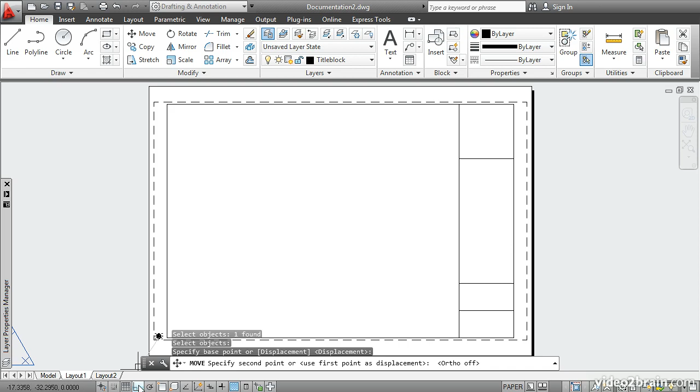Let's move this viewport into the title block area. The viewport can be treated just like a rectangle. Select the viewport rectangle and move it in. Turn off ortho if necessary and move it in to the lower left-hand corner of the title block space. Select it to activate its grips. Click this upper right grip and move it way up here to some arbitrary point.

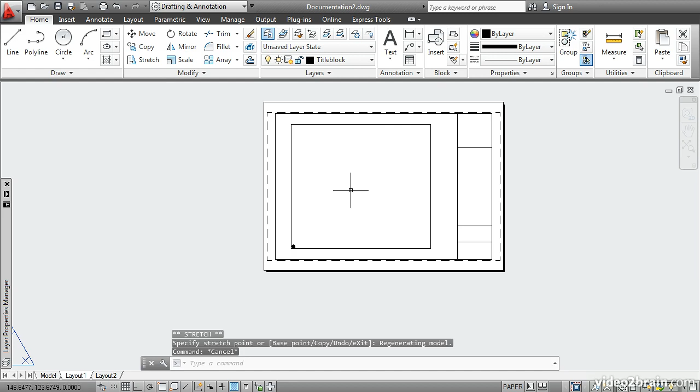Deselect by pressing Escape, and then double-click inside the viewport to activate it. What you're looking at now is called floating model space. This is the drawing area that is normally black on the Model tab. I can go ahead and pan and zoom to zoom into this drawing.

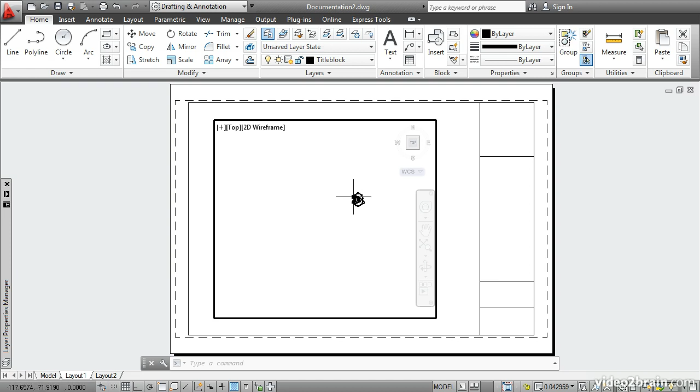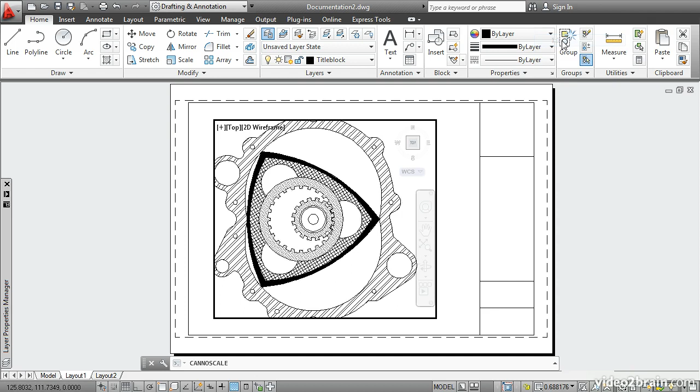Because I can do that, you might wonder, how am I going to scale this in relation to this sheet? And that is done down here with this pop-up menu. It's called Viewport Scale. Let's choose a scale of 1:1. Evidently, that's too large to fit on this particular sheet of paper. So let's choose a different scale. How about 1:2? That looks like it fits.

So now I'll double-click outside the viewport to switch back into paper space. This is where I can actually select the viewport frame itself and manipulate it. In this case, I'll make it smaller so that it more closely borders the geometry of the drawing. I'll press Escape to deselect. Now if I go in here and double-click, I activate model space within this layout.

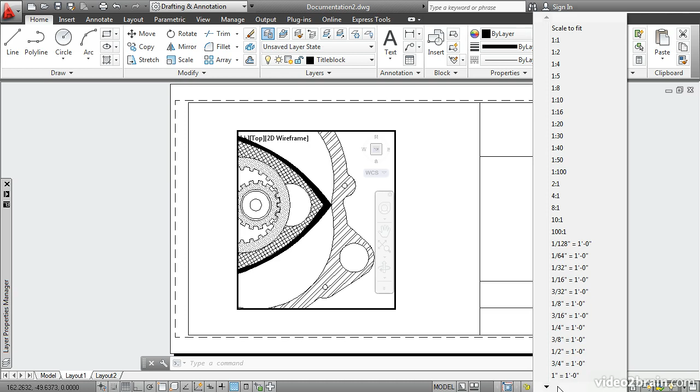I have to be very careful when I'm in this viewport because if I pan or zoom, I'll change the graphic scale down here. I want to make sure that the viewport scale says 1:2, and I want to make sure that I can see everything on the drawing. So I'll go back, double-click over here to switch back into paper space.

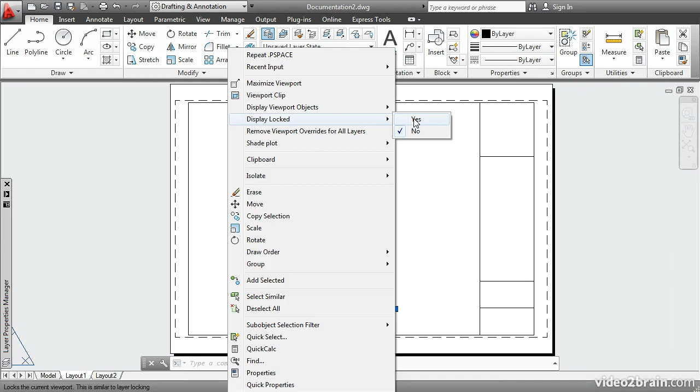I recommend that you lock your viewport after you've chosen a viewport scale for it and arranged it as we've already done here. To do that, select the viewport frame while you're in paper space, right-click, and choose Display Locked, Yes. Now let's look at the difference. If I double-click to go into model space and then try to pan or zoom, it doesn't let me do that within the viewport. It's panning and zooming all of paper space. That's the effect of locking a viewport.

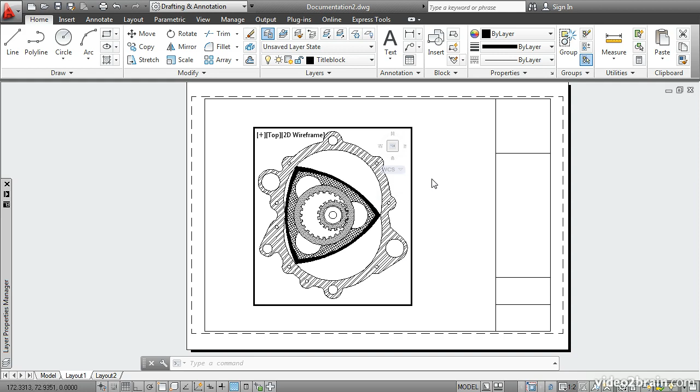Double-click out here to go back into paper space, and then move the viewport over so that we have some room over here in this area of the title block for another viewport. Next, click the Layout tab. Click Rectangular here in the Layout Viewports panel and select Rectangular. Click 2 points as if you're just drawing a rectangle, but you're actually drawing another viewport.

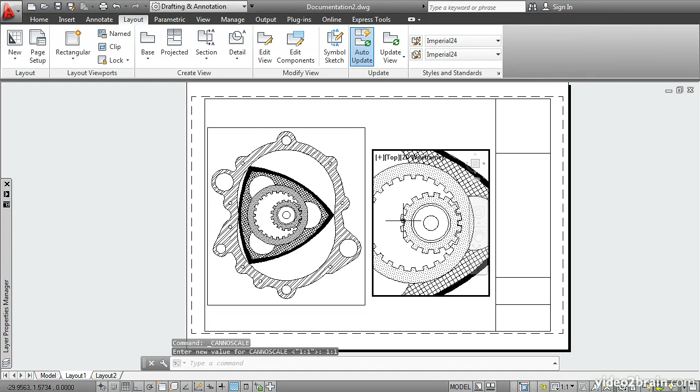Double-click inside of it to go into model space, and then choose a different viewport scale for this viewport. Let's try 1:1. This will allow us to focus in on a detail of the drawing. I'll pan, and I accidentally rotated the mouse wheel there, and I changed the scale down here. I have to be very careful. I'll choose 1:1 again, and you can see it says 1:1 as long as I'm in that scale.

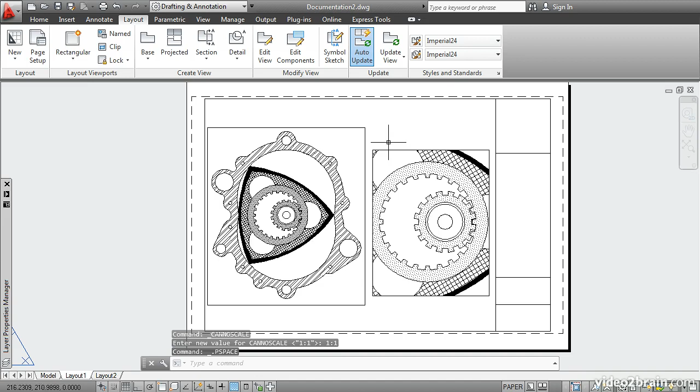Oops, it happened again. I'll switch to 1:1, and this time I'll double-click outside to go back into paper space. I'll zoom in a bit, select the viewport itself, and make it a bit wider. I want to focus in on this large gear. I'll bring the viewport frame in to crop all of the geometry around this circle. Okay, I'll press Escape to deselect.

Double-click inside, and I'll just verify that indeed the scale is 1:1. And at this point, I should lock this viewport so that I don't accidentally mess up the scale. I'll go back into paper space by double-clicking, select the viewport, right-click, and say Display Locked, Yes.

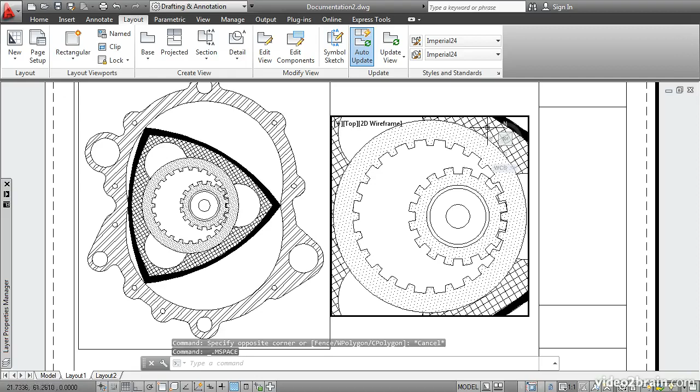Now, in this particular viewport, I don't want to see these objects outside of the gears. I can hide those using the Viewport Freeze feature of Layers. Double-click inside this viewport, click on one of these objects here, and you can go to the Home tab to see which layer it's on. This is on the hatch layer. Okay, let's keep that in mind.

Press Escape and select this circle. It's on layer 3. Okay, so let's freeze layer 3 and the hatch layer. Go over to the Layer Properties Manager. If you freeze the hatch layer, it freezes in all viewports, and that's not what we want, because I want to see it over here, but not over here.

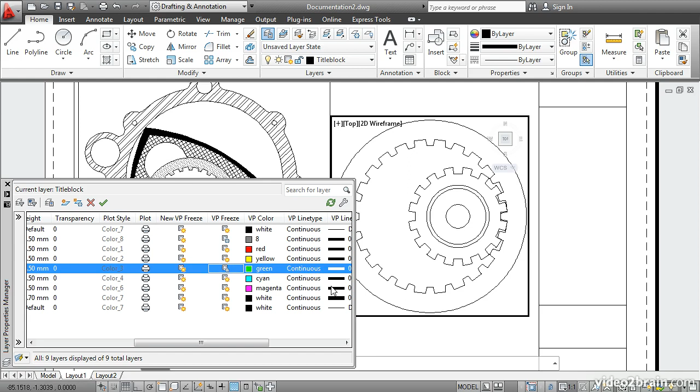So instead of freezing the layer, what you do is you scroll over and you freeze it here in this column, Viewport Freeze. It only disappears in the selected viewport. This column would be used if you want to freeze the layer in the current viewport and all new viewports that you create in the future. I'll also freeze layer 3 in this particular viewport by clicking this icon. There we go. Now I'll double-click outside the viewport to return to paper space.

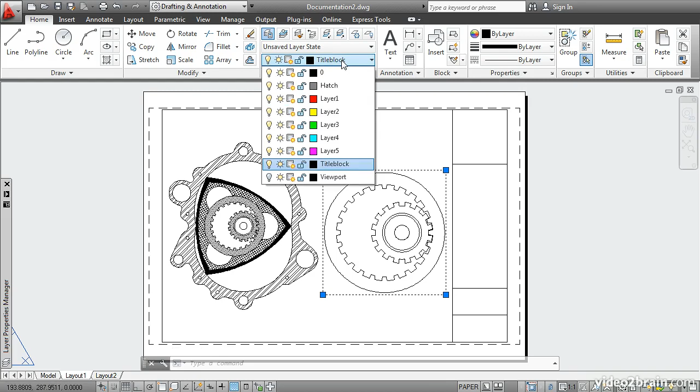Finally, let's turn off the viewport layer itself to hide these viewport frames. That will hide the viewport frame in paper space for both viewports. Now over here, this one doesn't look hidden. It's because this viewport was mistakenly drawn on the title block layer. I'll reassign that to the viewport layer, and it warns us that we've moved it to an off or frozen layer. Well, that was my intent, so I'll click Close.

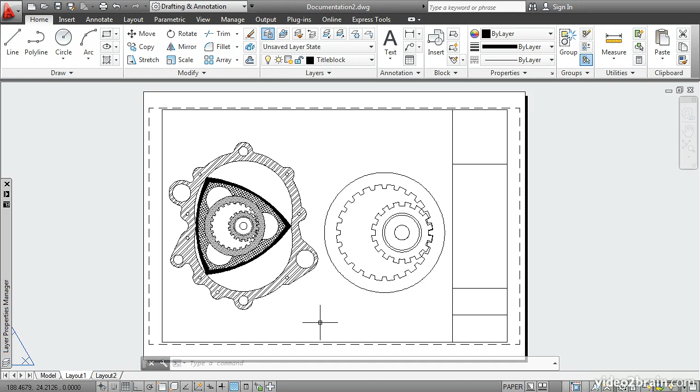So now we have two drawings of the same information at different scales, and we've controlled which layers are visible by freezing selected layers in a particular viewport.